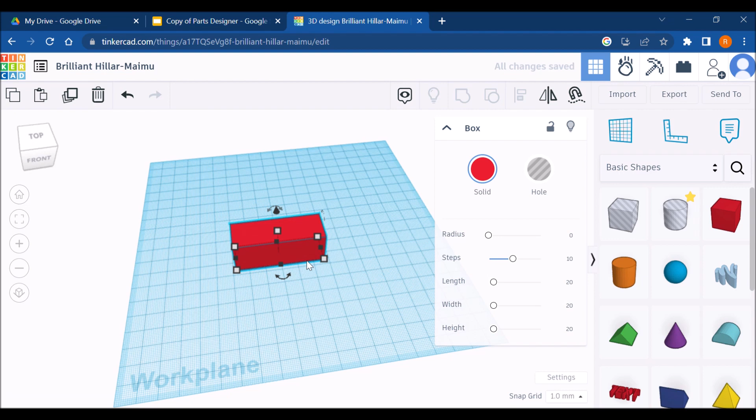Go 100, tab, 40, tab. I don't need a tab, it's already 20 millimeters tall. There, now let's carve out this hole.

How long is the hole? Well, it doesn't give me that dimension, but it does tell me that this little leg right here is 12 millimeters wide, and so is this one. So if the entire length is 100, we need to take away 12 and then another 12.

So 100 minus 24 gives you 76. So you know the distance between here and here has to be 76. That's the length of our hole. Its height is 8, and then its width, well, it cuts through the entire object, so its width is 40.

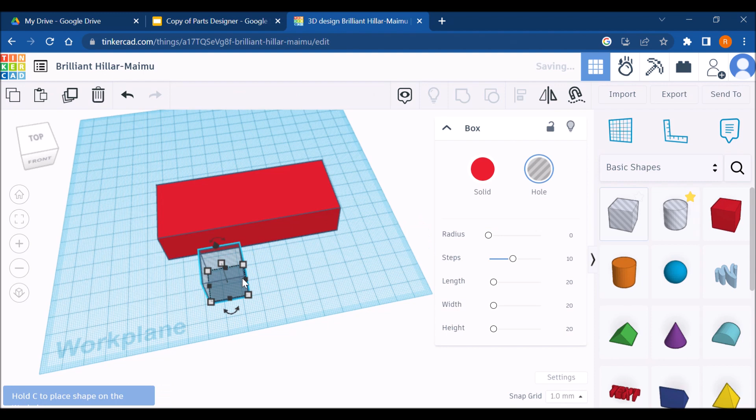So we need a 76 by 8 millimeter tall, by - it doesn't really matter how wide it is - hole. And then I'm going to center it, and again, doesn't matter how wide it is as long as it cuts through the entire object. Here we're golden.

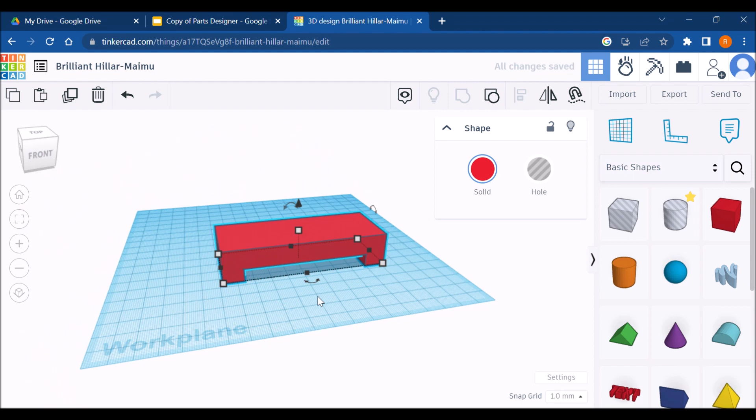We're going to click Control G to group it, and we are good. Next, we need to carve out the fillets, or the rounded corners.

We know the radius of this fillet has to be 6. If you already have a fillet made in your creations, you can use that, but you need to change something about it - I'll talk about that in a second. If you don't already have a fillet made, we're going to make one from scratch.

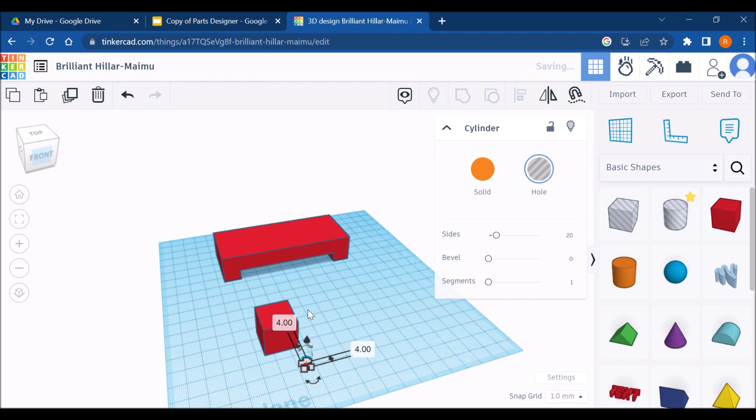So you'll drag a cube out and a cylinder. The cylinder has to be twice the diameter of your cube. My cube is a 20 by 20 cube, so my cylinder has to be 40 by 40.

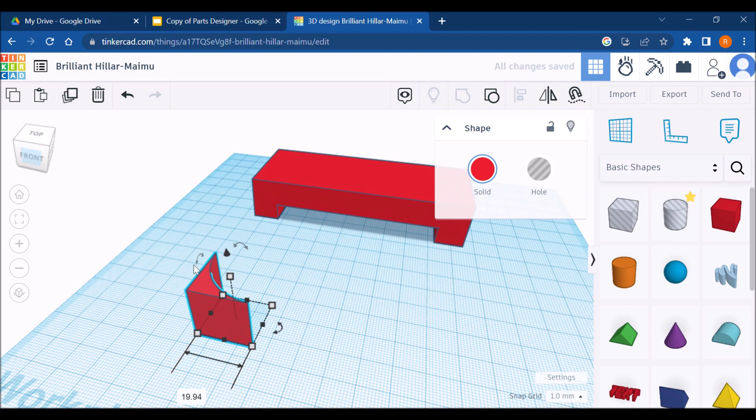Now I'm going to crank these sides up to 64, so it's an actually smooth cylinder, not all blocky. And then I'm going to align the corners, group it together. Now I have my fillet shape, or what needs to be carved out of the fillet shape.

I'm going to knock it over 90 degrees and elongate it, but remember, the radius of my fillet has to be 6. Currently it's 19.94, so basically 20. So I need to change that to 6, and its height also needs to be 6.

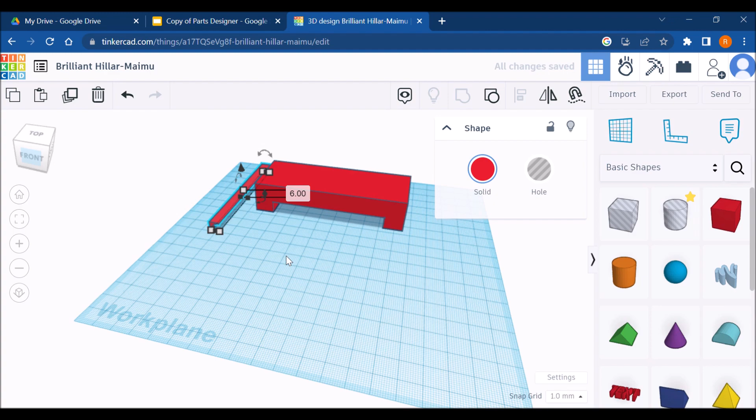Its length can be whatever it wants, so long as it cuts through the entire object. Now we need to align these guys. How do we do that? Well, we will align their tops, and then we'll align their leftmost edges.

Now, I didn't mean to do that. Before we group this, here's a little life hack: we're going to duplicate it. So click on your fillet, click Control D.

Now there's 2 fillets there, but only one is selected. With my left hand, I'm going to click Shift, and then I'm going to click on my base. So now I have 2 shapes that are selected. I'm going to group it, and you're going to notice there's still a fillet here.

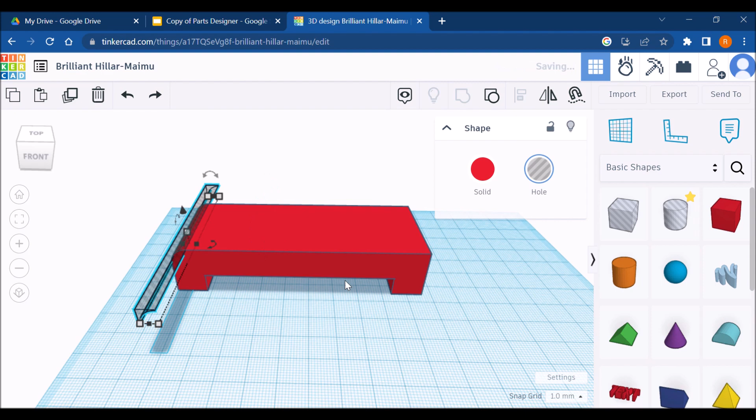We're not going to - no, don't do that. Just take your base and rotate it 90, 180 degrees, and then group this guy. It's going to line up perfectly. We just saved ourselves a bunch of time.

Now that we have our base made, let's carve out these holes. The radius of these holes is 6, which means the diameter must be 12. And the center of the holes are 20 millimeters from the edge of our base. Now, there's not a dimension that says that it's not centered, so we're going to assume that it is right smack dab in the center of the object.

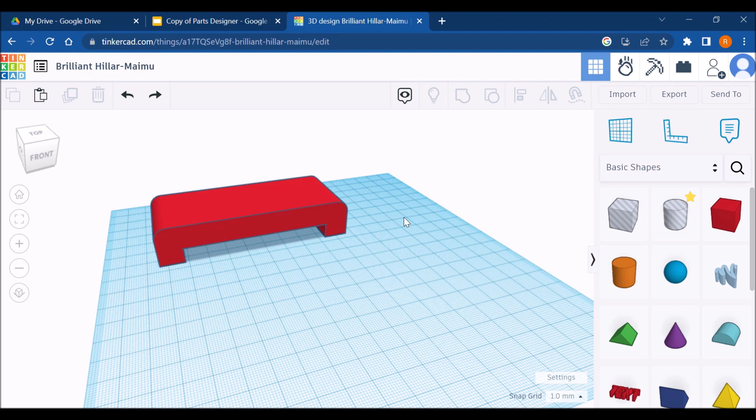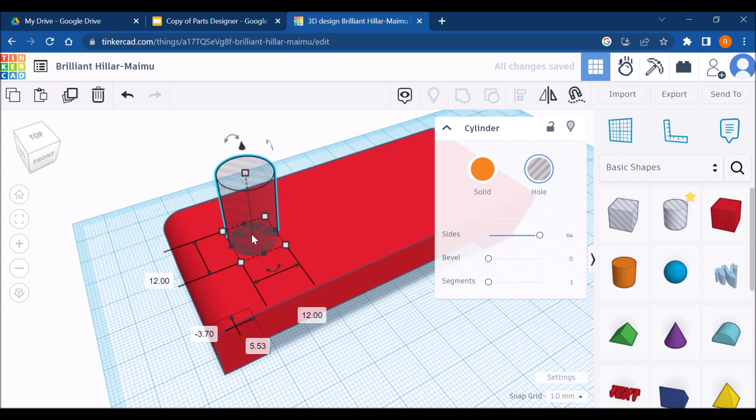So let's drag a hole out here. We said radius was 6, so the diameter must be 12. We're going to go 12 here, 12 here. Always crank those sides up to 64. That way it's actually a round cylinder and not like, I don't know, a polygon. Then we need to figure out how to put the center of this guy exactly 20 millimeters from this edge. How do we do that?

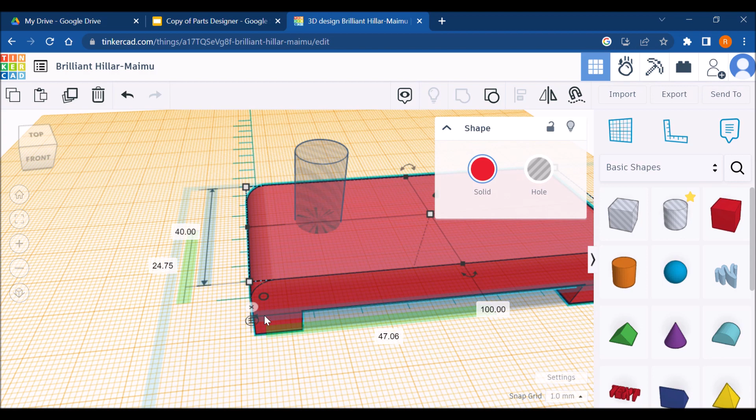Well, I'm going to drag a ruler out here, and currently I'm in midpoint mode. So there's a dimension that tells me how far away the middle of the object is from our origin. My origin's this circle right here. I don't want midpoint mode right now, so I'm going to click Use Endpoint, and that tells me that this corner of my object is 8 millimeters away from the origin. On the x-axis, 12, and the y-axis, I want that to be 0 for my x and my y. I want the corner of my object to be right smack dab on the origin.

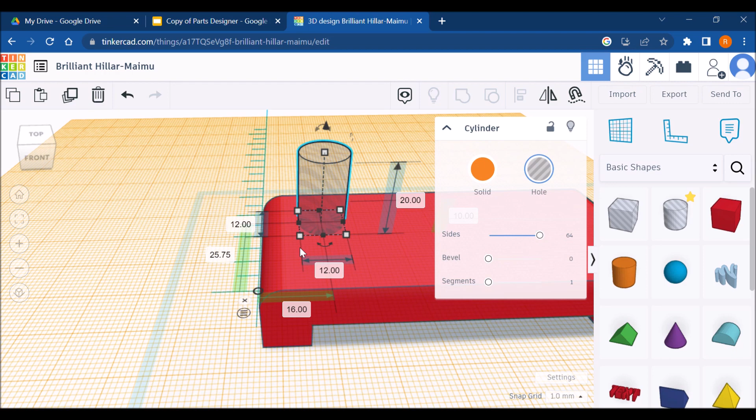Then I'm going to click on this guy. Now remember, my dimension over here said that the center of the circle was 20 millimeters from the edge. So I need to click on use midpoint. I'm going to click on this guy, and the center of the object needs to be 20 millimeters from the edge of my base. So I'm going to click 20 there. Now I know the distance between here and here is good. Now I just need to center it.

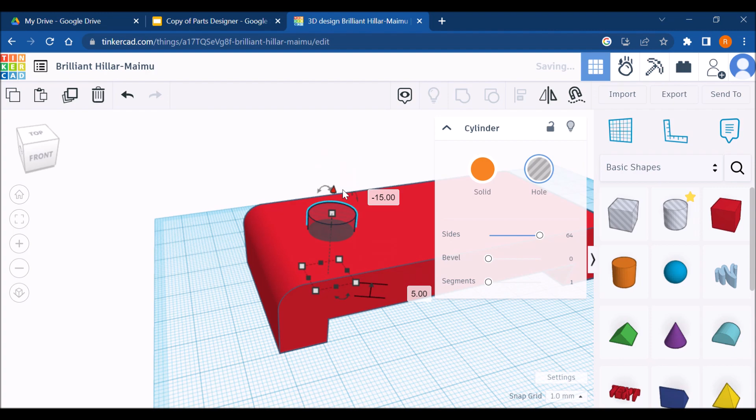So I'm going to use the alignment tool, and I'm going to get rid of this work plane, get rid of this ruler. We need to sink this hole down into our object. Now, I'm not going to click group quite yet. I'm going to click Control D to duplicate it, click Shift to select my base, and then group that duplicate so that I can rotate my object 180 degrees, and I know that that hole is going to be exactly where it needs to be. You can only do that on shapes that are perfectly symmetric. In this case, this shape is. So, my holes are good.

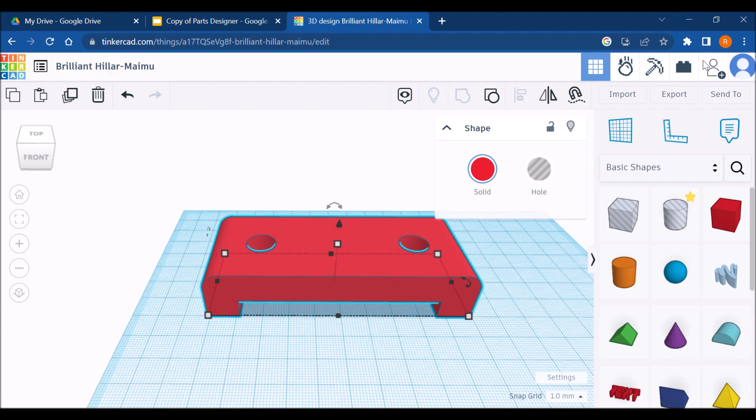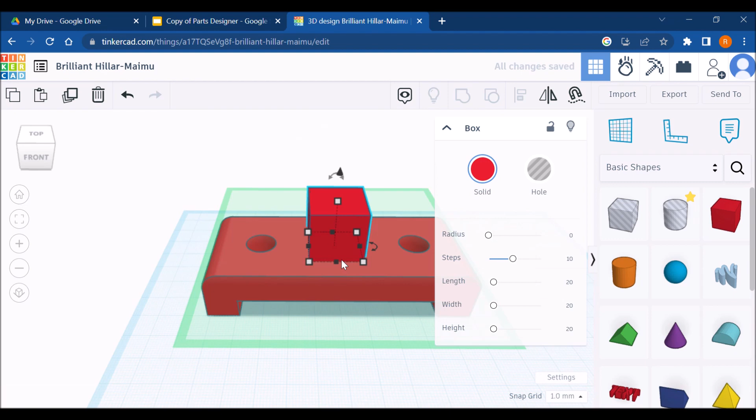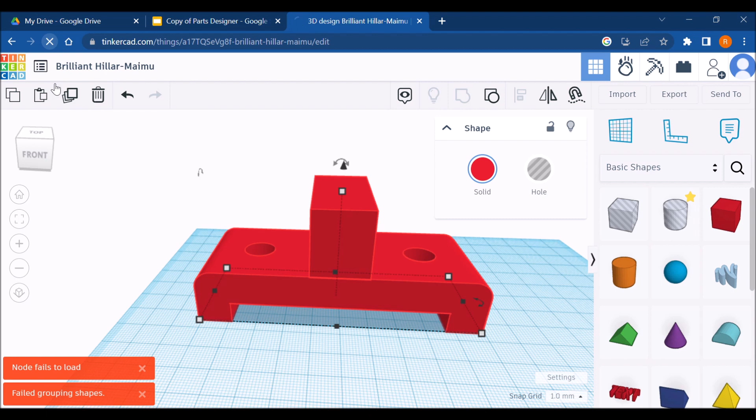Next, we need to work on this upright. Now, this upright is made up of a rectangle with a cylinder on top of it, and then we carve a hole through both those shapes. We're going to start with the rectangle. The rectangle is 20 millimeters wide by 40 millimeters long. How tall is it? Well, it's 24 millimeters tall. So, pretty easy. Throw this guy right here. 40 in this direction, 24 tall. And we'll click center, center, group it together. Alright, we're going to have to refresh. Beautiful.

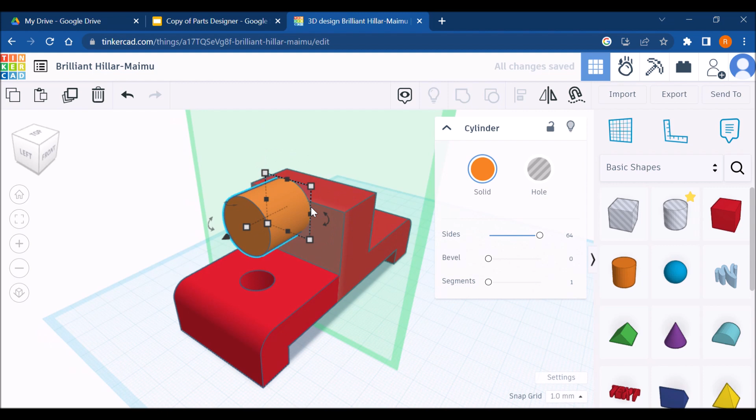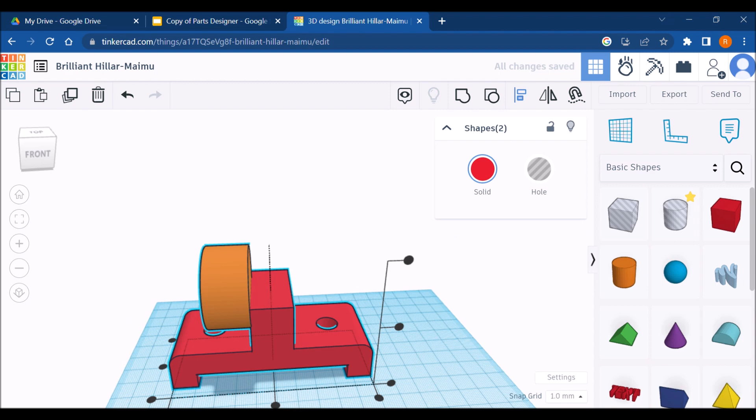Now we need to throw a cylinder on top of this guy. Always crank your sides up to 64, that way it doesn't look weird. And the cylinder needs to be as wide as our object is, so it needs to be 40 by 40. And in this case, let's just call this our width. Our width has to be 20. And we are going to align these guys, but we're not going to group them, right? Let's center there. If I were to group this, there would be a weird corner right here, and we can't have that. Why is that there?

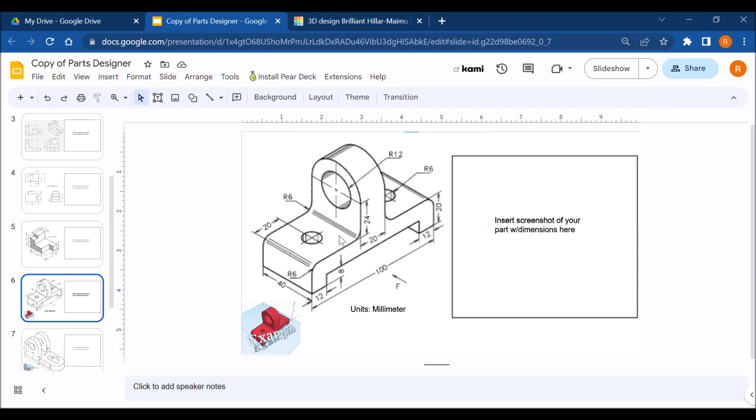Well, the center of our circle has to be 24 millimeters off of the top of our base. So we need to make sure the center of this guy is 24 millimeters from essentially this corner right here. How do we do that? Well, let's throw a work plane on that face. Let's drag our ruler out and click on this guy.

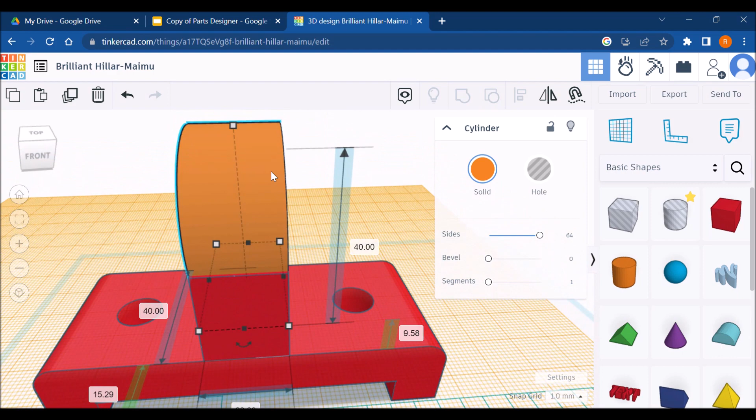Currently, I am in endpoint mode. I want to know the measurement between the center of my cylinder and this guy, so I need to click on midpoint mode. Where is that? Well, it's in a super inconvenient spot. It's right here. So we're going to click use midpoint. And did that work? No, it didn't. Come on.

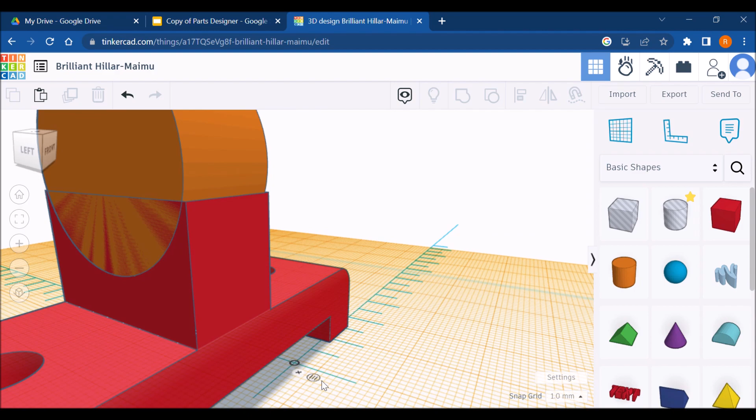There we go. We're in midpoint mode. Click on this guy. No, we're not. Why are we not in midpoint mode? There we go. Okay, yeah, there we go. So the midpoint right now is 30 millimeters. From here to here, it needs to be 24. So we're going to type in 24.

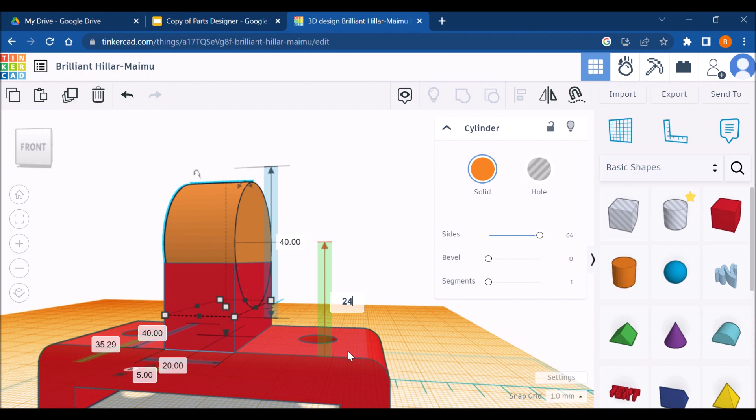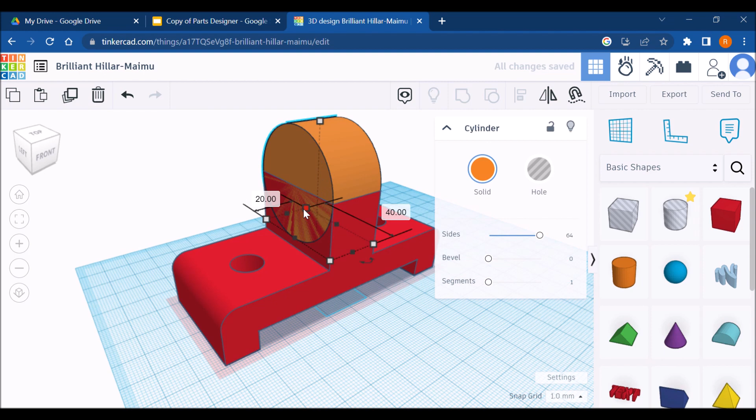And that should line up this guy perfectly with the edges of my rectangle. Let's group that together, see what it looks like. Beautiful. Look at that. There's no weird cracks. That's what we want. Now let's get rid of these dimensions because they are super annoying. Now I'm actually going to ungroup this. I did that by double clicking on my object, and I'm going to lock this cylinder in place.

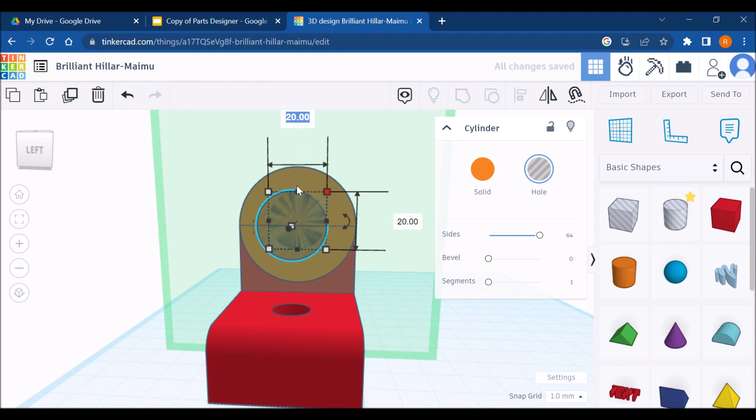I just need to ungroup everything. This guy's locked, which means it can't move. That's what we want. We need to put a hole right here. That hole has a radius of 12 or a diameter of 24. So we're going to throw a cylinder up here, crank those sides up to 64, go 24, tab 24. We're going to align the centers.

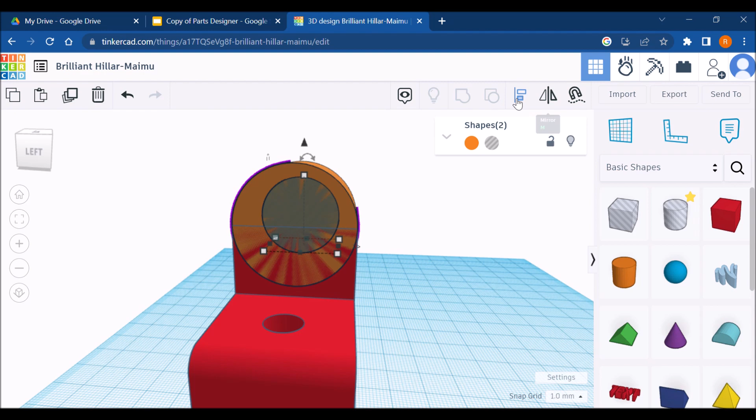Now, the solid cylinder is locked in place so it can't move. I'm going to click shift and then click on my hole. When I click align, I know that my solid cylinder is not going to move and only my hole will. And that's what we want. So it's completely centered. It's perfect. Now I'm going to unlock this cylinder and select everything, group it together. Beautiful. There's no weird lines. That's exactly what we want.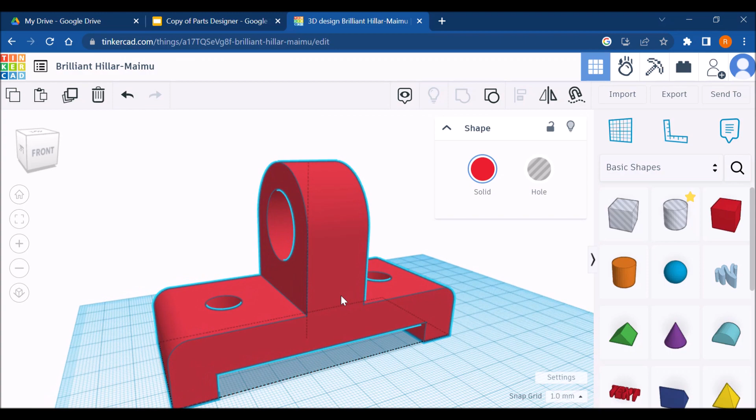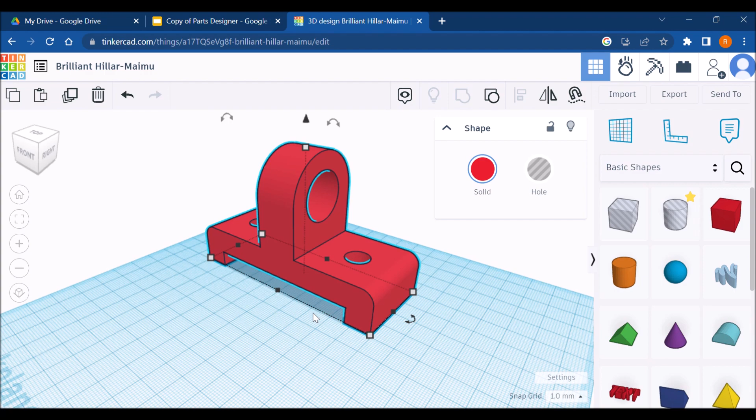Alright, last thing we need to do is fillet this corner and this corner. Now I highly suggest you don't ungroup all this and then steal this fillet from right here, duplicate it, turn this out. I wouldn't do that because when you start ungrouping things and then regrouping them, you tend to screw something up and then you get weird seams that you can never fix. And then you have to restart the object all over again. So I really wouldn't do that.

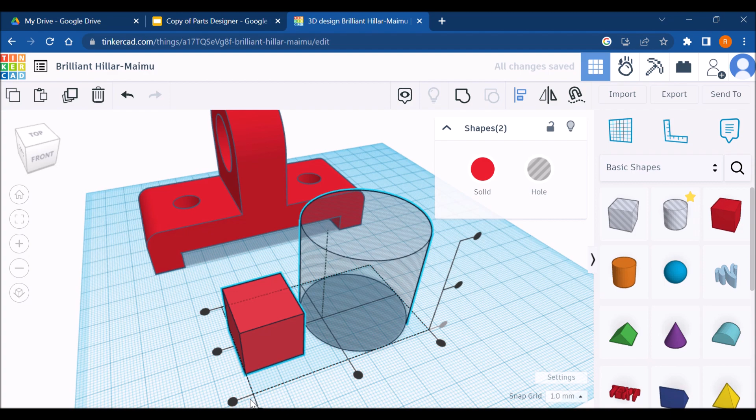Just make the shape fresh, or better yet, make the shape and then save it under your creations. Now I can make a fillet pretty quickly, so there's not a whole lot of time lost. We'll go 40, crank those sides up to 64, align. Make this guy super tall, and this guy needs to be 6 by 6. Now, it actually needs to be 40 tall. Let's just make it 40 tall right now.

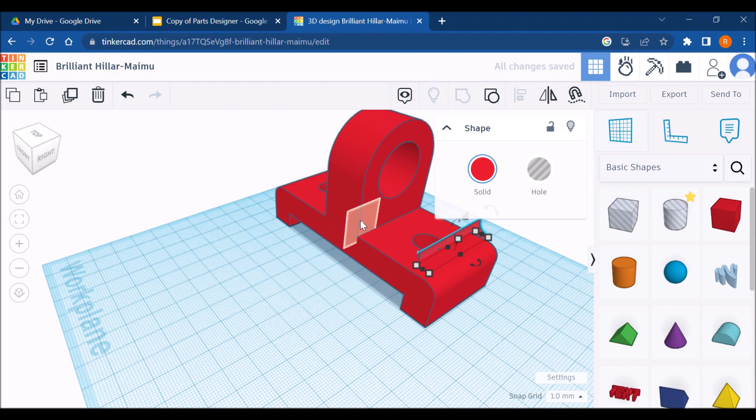Flop it over on its side, 90 degrees, and then we're going to put a work plane right here. I'm going to click D to drop it to the work plane, so I know the bottom of my fillet lines up perfectly with this face. Then I'm going to throw a work plane right here, and click D. That's going to drop my fillet to that work plane, so I know face-wise it is flush against this face and this face. There's going to be no weird cracks or seams in there.

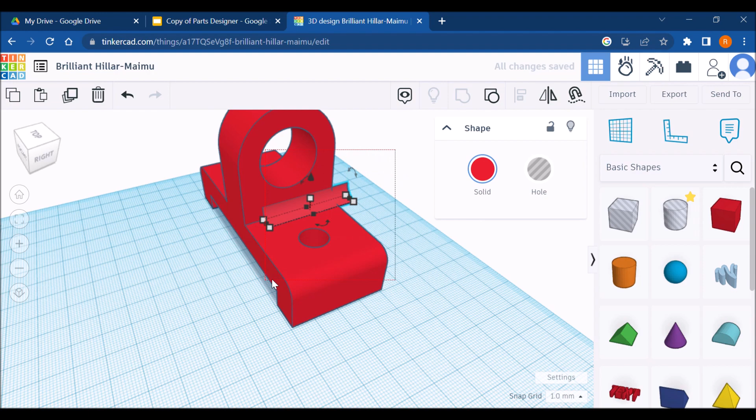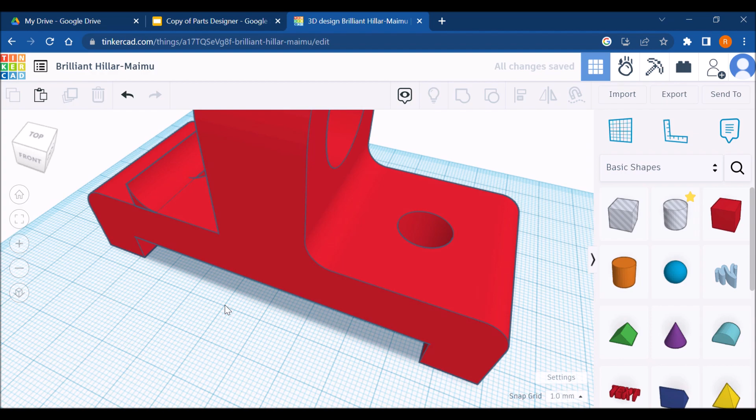I'm going to get rid of my work plane, and I'm going to center that, and I'm going to group it. And let's hope and pray that nothing weird happens. Oh yeah, beautiful. No weird cracks. Now I am actually going to duplicate this guy, send it on over here, because I want to and I don't want to remake that fillet. And there's a very low risk of me screwing anything up.

Throw a work plane right here, click D, group it together, and hope that there's no weirdness. Doesn't look like there is. Boom. Beautiful. Hey, we made the object.